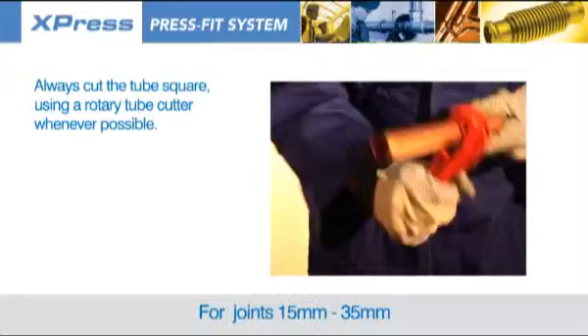Always cut the tube square using a rotary tube cutter whenever possible. When using plastic coated carbon steel tube, remove the coating using the S115 stripping tool. Deburr the tube end both internally and externally.

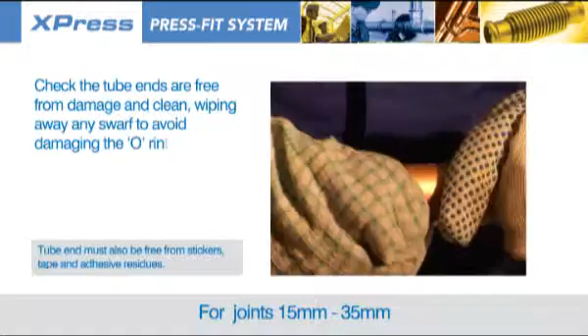Check the tube ends are free from damage and clean, wiping away any swarf to avoid damaging the O-ring on tube insertion. Mark the socket depth with a marker.

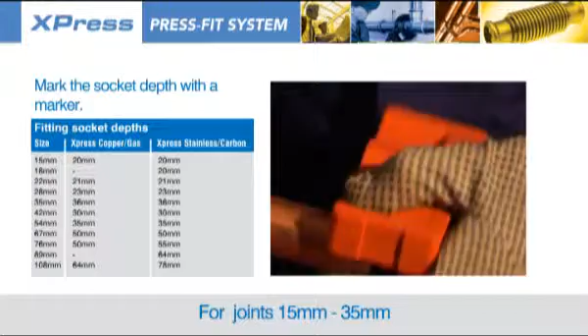Select the correct type and size of fitting.

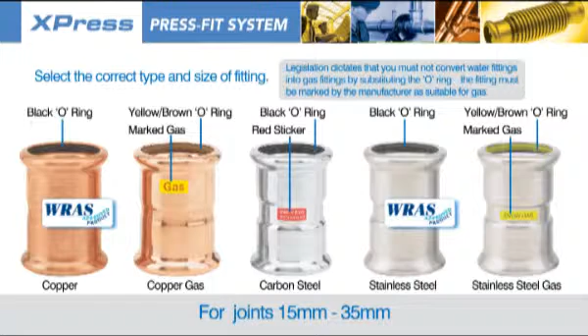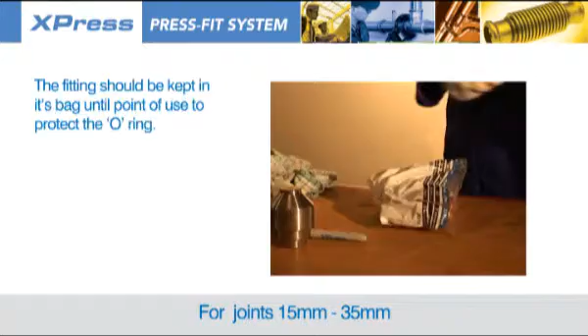The fitting should be kept in its bag until point of use to protect the O-ring. Check the fitting is free from damage and the O-ring is seated correctly. Due to the leak before press feature, a slight triangulation of the fitting socket is intentional and should not be mistaken for damage.

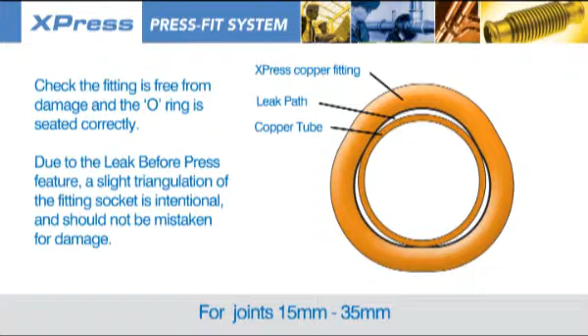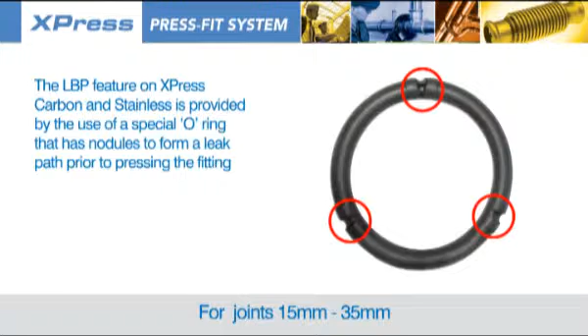The leak before press feature on XPress Carbon and Stainless is provided by the use of a special O-ring that has nodules to form a leak path prior to pressing the fitting. The O-ring integrity is critical, as it is this that forms the seal. This is why tube preparation is vital to ensure the O-ring is not compromised on insertion of the tube.

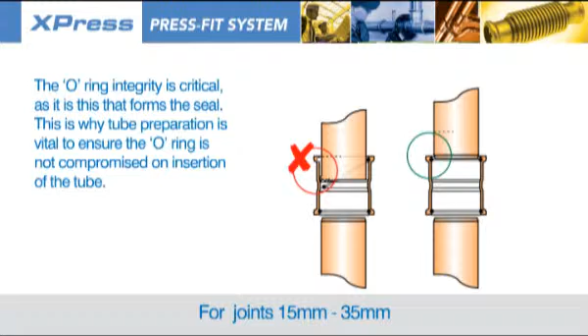Insert the tube into the fitting until it meets the tube stop and corresponds to the depth mark made earlier.

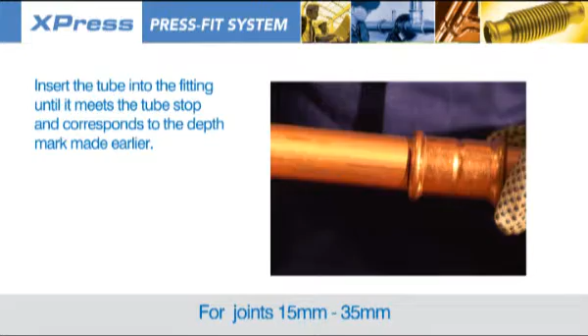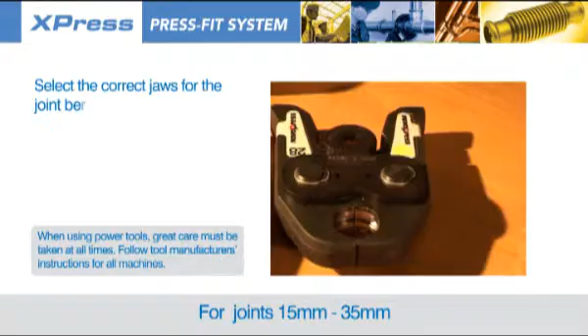Make the tool safe by isolating it from the power supply. Select the correct jaws for the joint being made, checking that they are free from damage. Attach to the press tool and reconnect the power supply when ready.

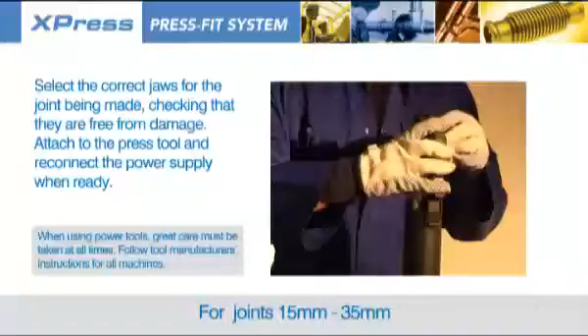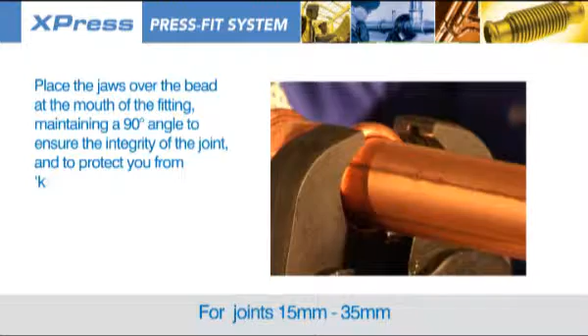Place the jaws over the bead at the mouth of the fitting, maintaining a 90-degree angle to ensure the integrity of the joint and to protect you from kickback, where there is a risk of the machine moving sideways.

It is important to allow sufficient clearance around each fitting to allow the press fit jaws or sling to be attached without hindrance and to provide sufficient access for the press tool.

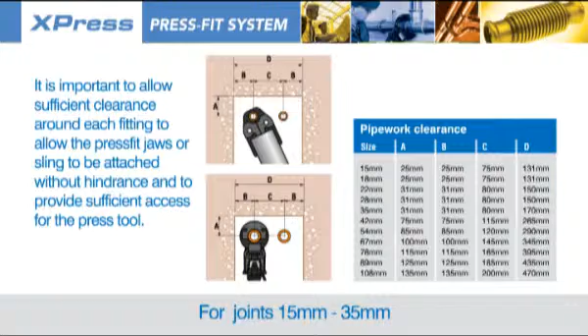With the tool fully supported and not hanging from the pipework and with your hands safely away from the jaws, start the pressing cycle.

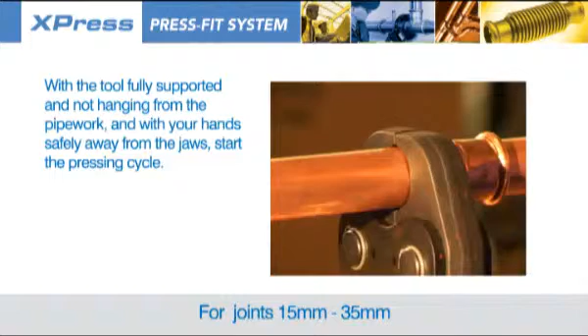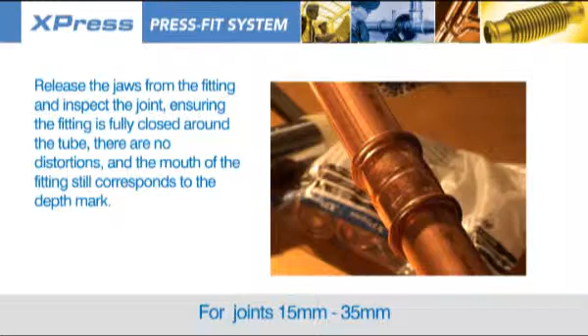Release the jaws from the fitting and inspect the joints, ensuring the fitting is fully closed around the tube, there are no distortions, and the mouth of the fitting still corresponds to the depth mark. If all is in order, mark the joint as complete.

Tube preparation and joint assembly for 42 to 108mm fittings is the same as for the smaller sizes. It is essential to use sling jaws as these provide a more equally distributed force than two-piece jaws, ensuring reliability.

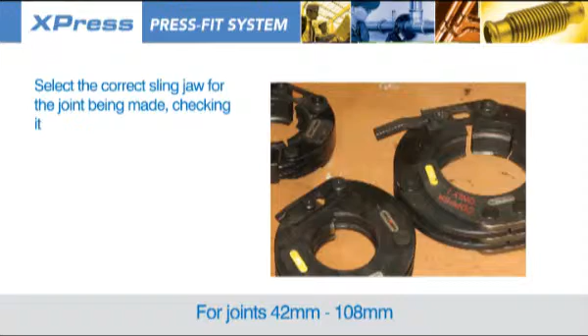Select the correct sling jaw for the joint being made, checking it is free from damage and suitable for the material you are using, as jaws for copper and steel differ at 108mm.

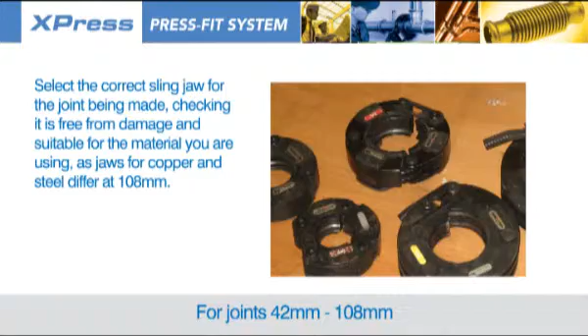It is essential to lubricate the sling by applying S135 lubricant to the pressing profile groove between the main sling arms and the moving segments and along the pivot pins.

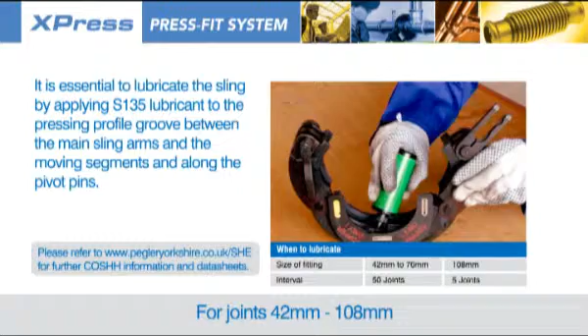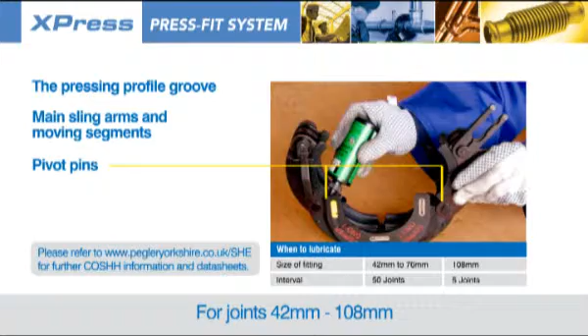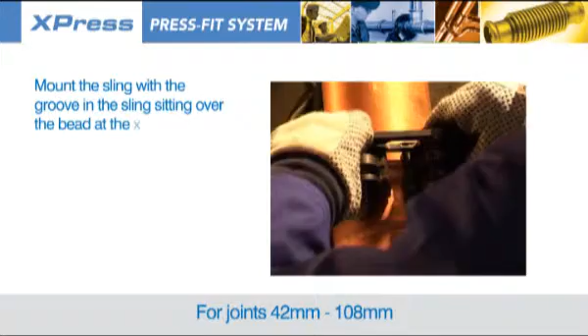Take care to wipe off any excess to prevent contaminating the O-ring. Mount the sling with the groove in the sling sitting over the bead at the mouth of the fitting, taking care not to trap your fingers in the sling.

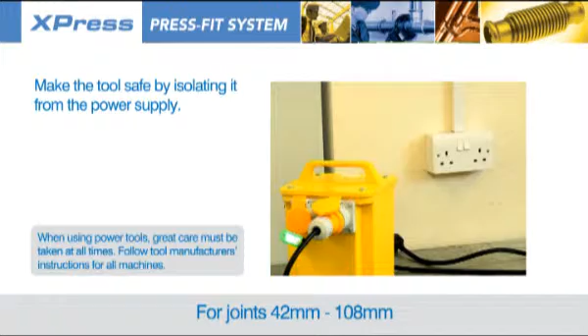Make the tool safe by isolating it from the power supply. Select the correct adapter and attach it to the press tool, following the instructions for the press tool, and then reconnect the power supply when complete.

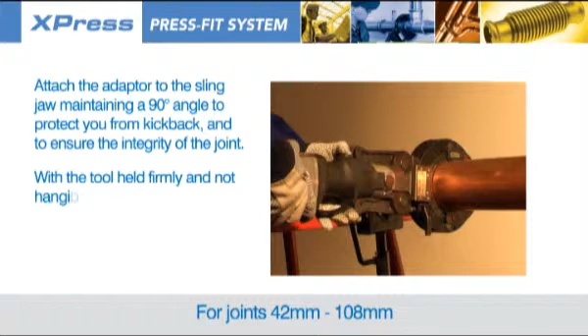Attach the adapter to the sling jaw, maintaining a 90-degree angle to protect you from kickback and to ensure the integrity of the joint. With the tool held firmly and not hanging from the pipework and your hands safely away from the jaws, start the pressing cycle.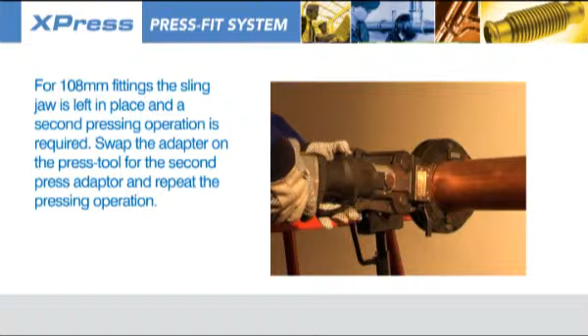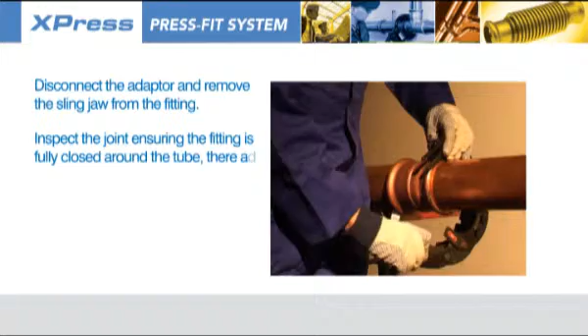Disconnect the adapter and remove the sling jaw from the fitting. Inspect the joint, ensuring the fitting is fully closed around the tube, there are no distortions, and the mouth of the fitting still corresponds to the depth mark made earlier. If all is in order, mark the joint as complete.

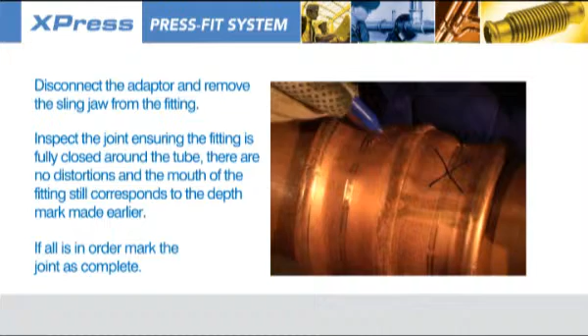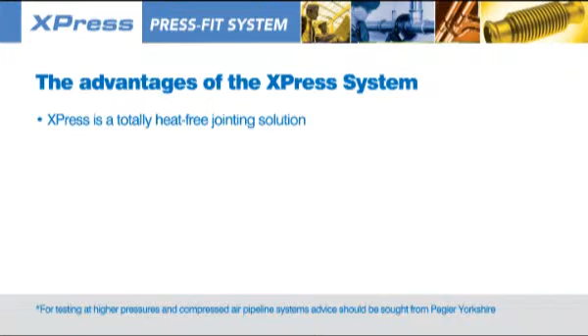The advantages of the XPress system: XPress is a totally heat-free jointing solution. It reduces installation times, providing major cost savings. No need for hot works permits or additional costly insurance.

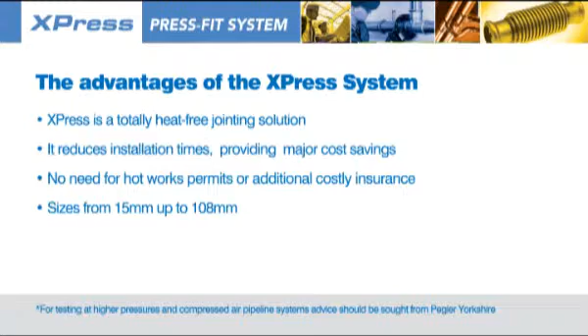Sizes from 15 to 108mm. Complete systems have an exceptionally clean bore with no flux residues. XPress covers a wide variety of applications in modern building services.

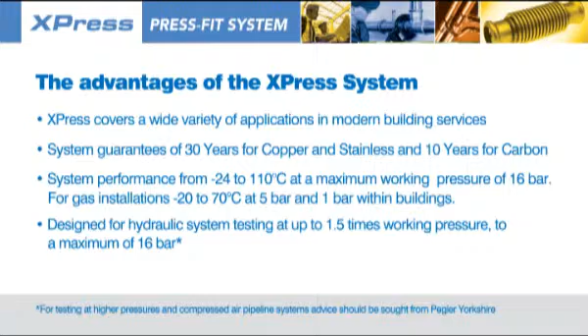System guarantees of 30 years for copper and stainless and 10 years for carbon. Excellent system performance from -24 to 110 degrees C at a maximum working pressure of 16 bar. Gas installations: -20 to 70 degrees C at 5 bar, and 1 bar within buildings. Designed for hydraulic system testing at up to 1.5 times working pressure to a maximum of 16 bar.